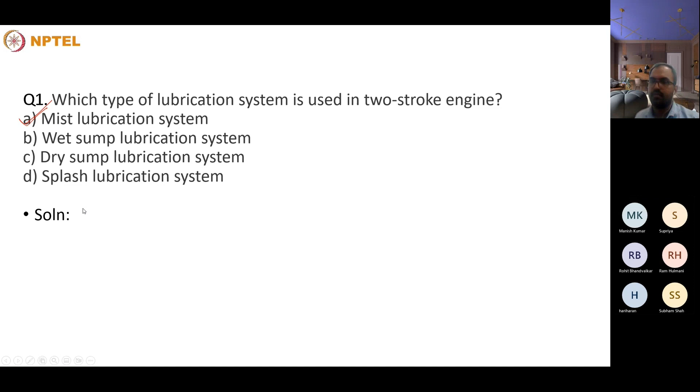Don't know the reason sir, but... Yes, so the splash lubrication system and pressure-based lubrication systems are the common forms used, but pressure-based systems are even more common than the splash-based system.

Here the lubricant oil will be passed through a sump, just like the splash system. There will be a sump from where the oil is pumped through different channels, with various distribution channels used for cooling and lubricating bearings, crankshaft, and piston cylinder arrangements. Compared to the splash system, where there is possibility of random splashing, the pressure-based system ensures only targeted areas are lubricated, not randomly every point.

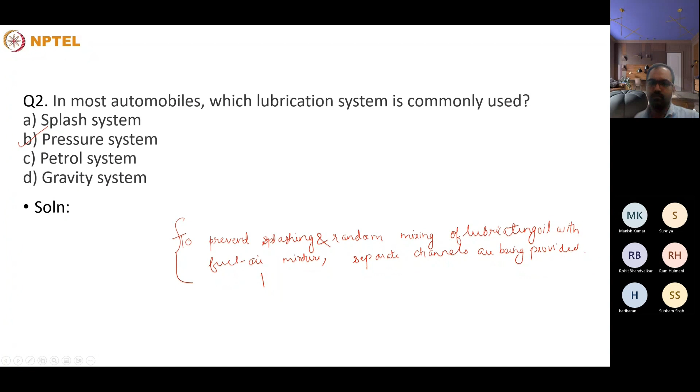The answer is a relief valve. The pressure inside the lubrication system is controlled by a relief valve. In the dry sump lubrication system, if the filter is clogged, the pressure relief valve opens, permitting oil to bypass the filter and reach the supply tank. So if the oil filter gets clogged by dust or impurities, pressure builds up which can be detrimental to the high pressure pump used in the lubricating oil line. To prevent that, we operate a relief valve which bypasses the oil and it goes back to its supply tank.

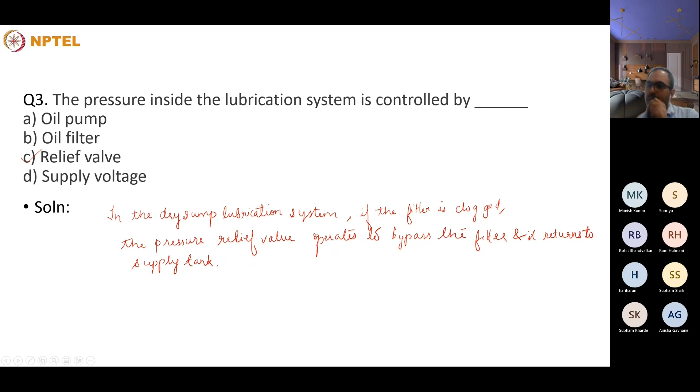Blow-by is a phenomenon in which the combustion gas produced in the cylinder escapes through the piston ring to the crankcase. So when the piston moves from top dead center to bottom dead center in the power stroke, the amount of combustion gas present in the cylinder will be less compared to the normal case, thereby we get comparatively lesser power if this blow by happens.

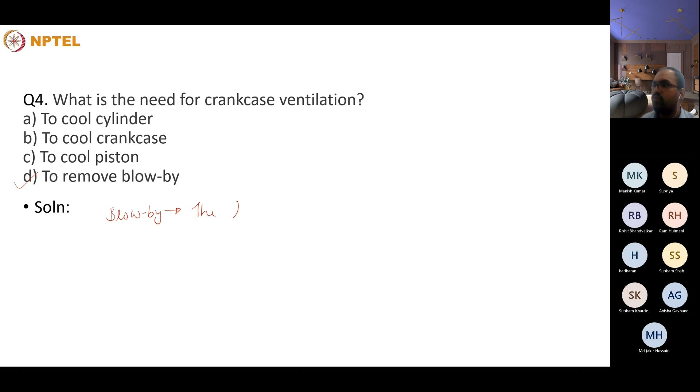The explanation is: blow by means the leakage of products of combustion of fuel-air mixture through the piston rings to the crankcase. This is an issue, and to prevent that, we have to provide ventilation.

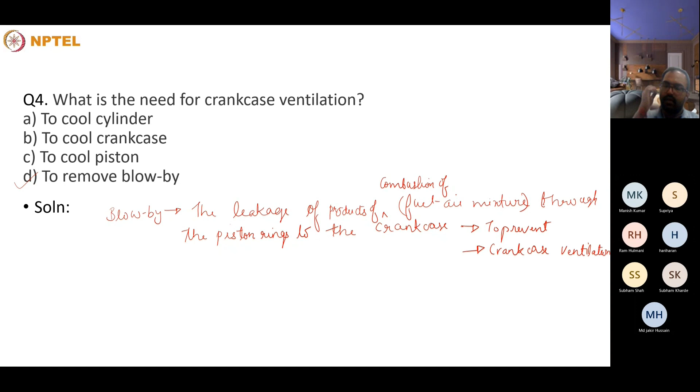We have to provide crankcase ventilation, an opening for the gas to go out to prevent damage, since these combustion products are at high temperature and high pressure, and that can damage the crankshaft and several other associated parts of the IC engine.

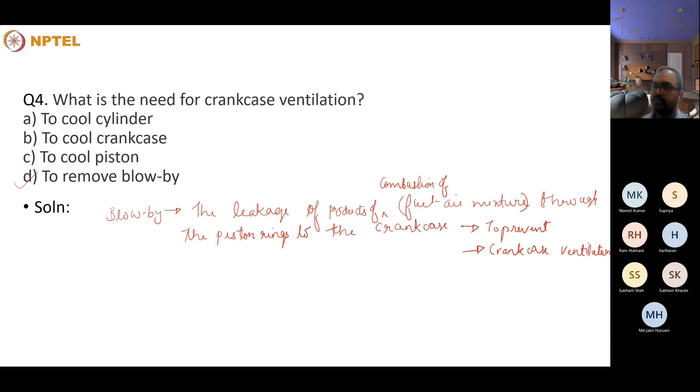The main reason why the lubricant is used is to smoothen out the sharp edges of the casted cylinder. The cylinder's surface will not be smooth; it might have some protrusions, and that can create frictional effects. This friction can act as an opposing force during the power stroke, and the maximum amount of power we can attain in the power stroke will be reduced because of this. To prevent that, we should provide some lubrication, given by the oil, lubricant, different kinds of lubricant oils.

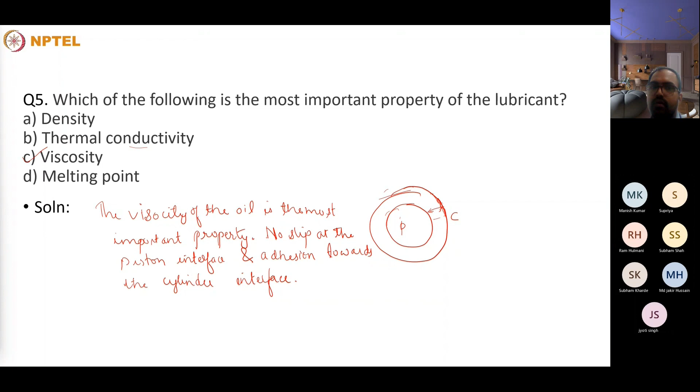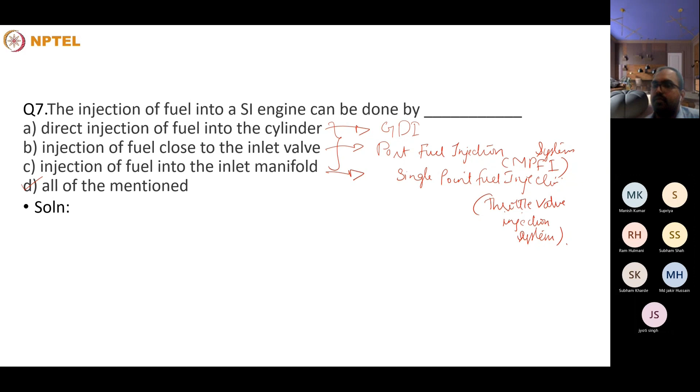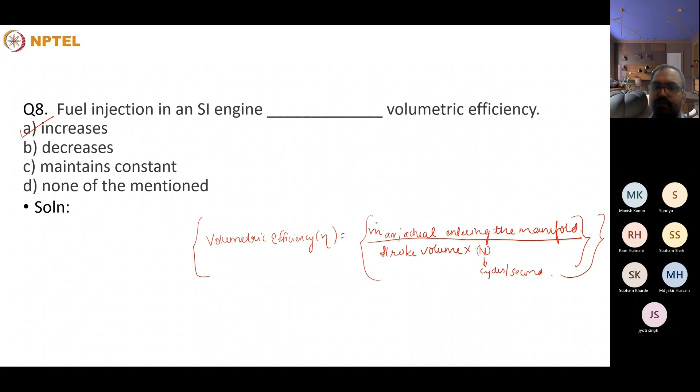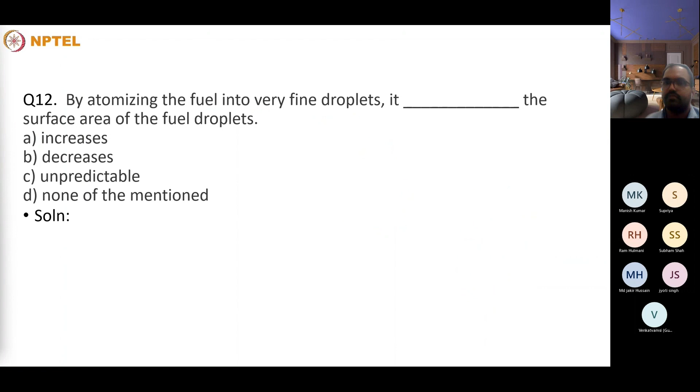Right, okay, so the answer is all of them mentioned. It can be used for finely atomizing the fuel. A compression spring will be doing the up and down of the spindle. Nozzle, which will be directing the fuel into the air, and then there will be an injector body which will be having the high pressure fuel in it. So all these will be combining together to form an assembly of the injector, all performing particular duties.

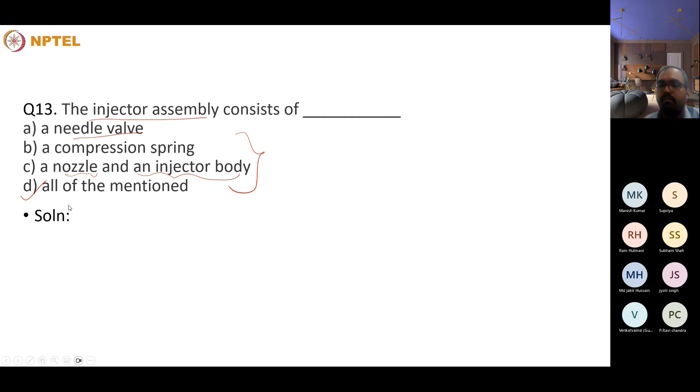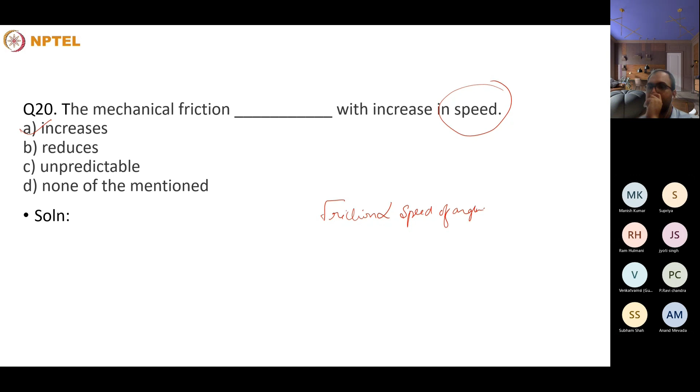Sir, excuse me. Is that frictional power, sir? No, that is also there - that will also take into account the friction of the cylinder. But in that case, what we mentioned was that we compared between different loads, right? Full loads and half loads.

Here it is with respect to the speed. So what we considered there was that with respect to the load, the frictional power remains the same. So the brake power varies and correspondingly the indicated power will also vary. Frictional power remains constant with respect to load - in one of the previous classes we have studied that, right? But with respect to speed of the engine, friction will be increasing. So the more the RPM at which the crankshaft rotates, the piston correspondingly will be moving that much faster, and correspondingly the friction associated will also increase. Understood? Yes, sir.

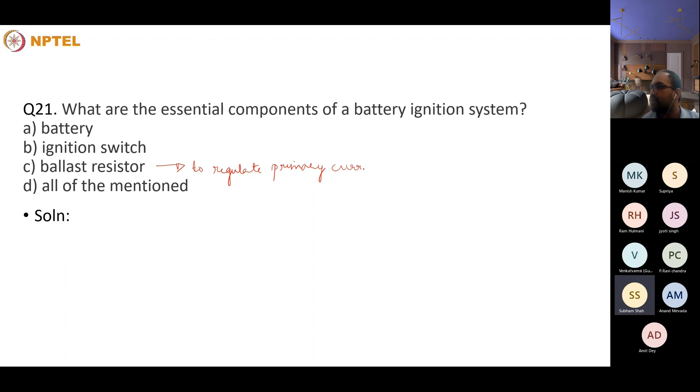So can anyone say what is the use of a ballast resistor? Why is a ballast resistor used? Why is a resistor used in a... to regulate the primary current in order to increase the life of breaker contact points. Right, so ballast resistor is used to regulate primary current - primary current means current in the primary circuit - to increase the life of breaker contact points.

Why is an ignition switch used? Can anyone say? Sir, it's simply the job of a switch - to connect or disconnect the ignition system, sir. Right, right, it's used just for connecting or disconnecting. Yes sir, it's simple.

Some other features are that there will be some capacitors, breaker points, a primary coil and a secondary coil. The EMF produced in the primary coil, the variation of current, will be generating a corresponding EMF in the secondary coil.

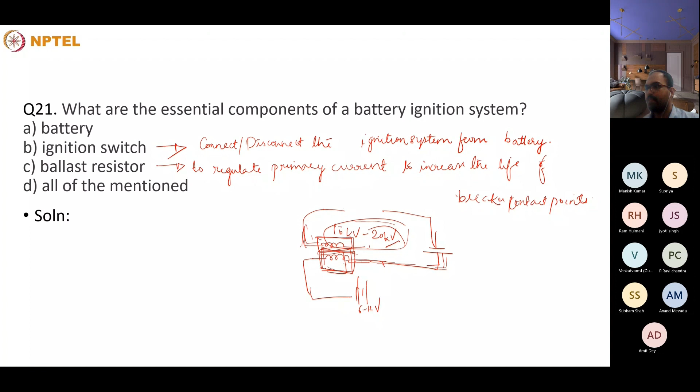This is a diesel fuel injection system, the CI injection case. So what will be the inputs used in an electronically controlled diesel fuel injection system? The options are engine speed, crankshaft position, accelerating pedal position.

How many of you know what will be the process of modern diesel fuel injection systems? What will be the components of a fuel injection system? Take the case of electronic fuel injection. So what will be the components?

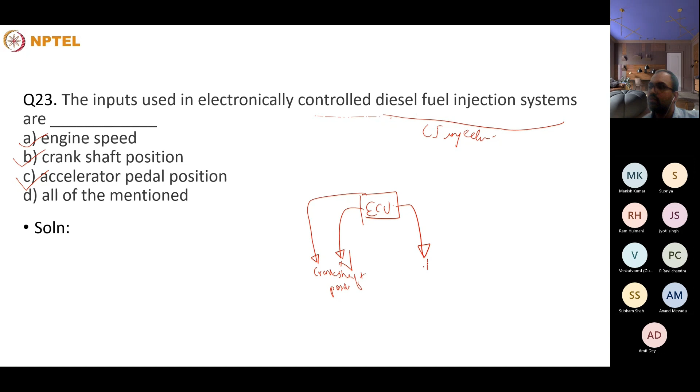There will be an ECU, electronic control unit, and that will be taking input from a lot of things. One is engine speed, another is crankshaft position, another is accelerating pedal position of the throttle. Also it will be taking the inlet air temperature, cooling water temperature, cooling jacket temperature, or lubricant oil temperature, and also the incoming ambient air temperature.

Using these inputs, the electronic control unit will be checking what the appropriate condition is right now, and based on that it will take a decision, and that feedback will be given to a fuel pump system, which will regulate the flow of fuel to be injected into the incoming air, maybe in the inlet manifold or near the port.

Based on these inputs, the fuel volume flow rate will be controlled depending on which case we operate the engine. If idling, we need a rich mixture. If cruising, we need a lean mixture. If accelerating, when we need more power, we again need a rich mixture. So based on this, we control the volume flow rate. The inputs can be engine speed, crankshaft position, accelerating pedal position (throttle position), intake air temperature, lubricant oil temperature, water jacket temperature, and ambient air temperature.

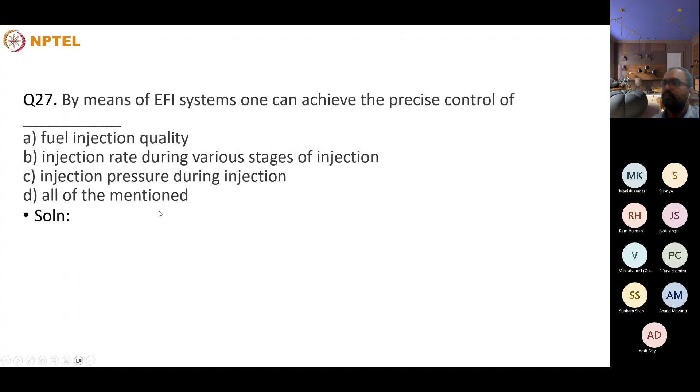This is a question regarding the quantity of fuel to be injected per cylinder per cycle. Can anyone please solve it and find out the answer? It's the case of a 6-cylinder, 4-stroke diesel engine developing 125 kilowatts at 3000 RPM. Its brake specific fuel consumption is 200 gram per kilowatt hour. Specific fuel consumption is in terms of mass divided by the power produced in the cycle.

Calculate the quantity of fuel to be injected per cycle per cylinder. Specific gravity of the fuel is taken as 0.85, so the relative density is 0.85. Can you please figure out what will be the quantity of fuel to be injected per cycle per cylinder?

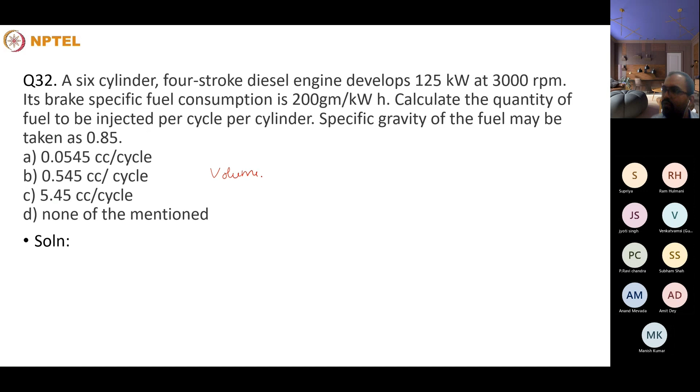Let me write this on the next page, otherwise it can be confusing. So the volume of fuel in terms of cc per cycle equal to mass of fuel per cycle divided by density of the fuel. So mass of fuel is 0.0463 grams divided by density in relative terms 0.85. We'll get somewhere around 0.0545 cc per cycle. So the answer is the first option.

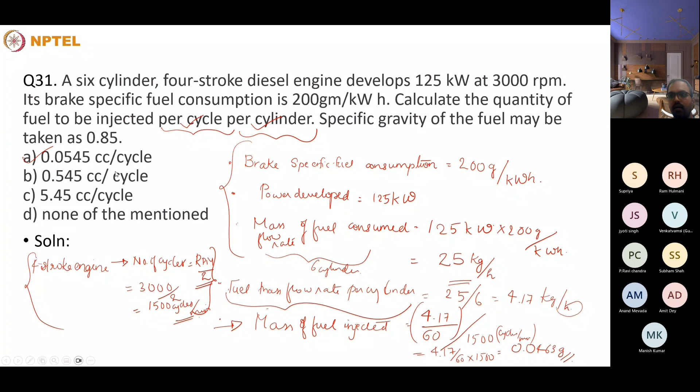So in that particular problem, we had the brake specific fuel consumption given. We calculate the mass flow rate of fuel based on the power developed, and that value is for all 6 cylinders combined together. We find the mass flow rate per cylinder, then calculate the mass of fuel injected from the mass flow rate of fuel by taking into consideration the number of cycles per minute of the four-stroke engine. After calculating the mass flow rate of fuel per cycle and per cylinder, we calculate the volume flow rate using the density, which is given as 0.85. Since the question's unit is given in terms of cubic centimeter, we used the relative density rather than the pure density.

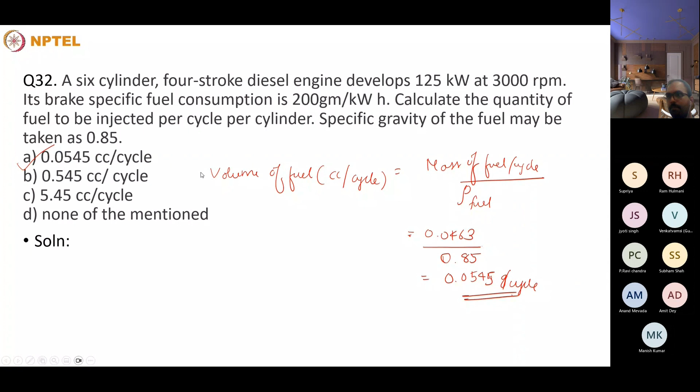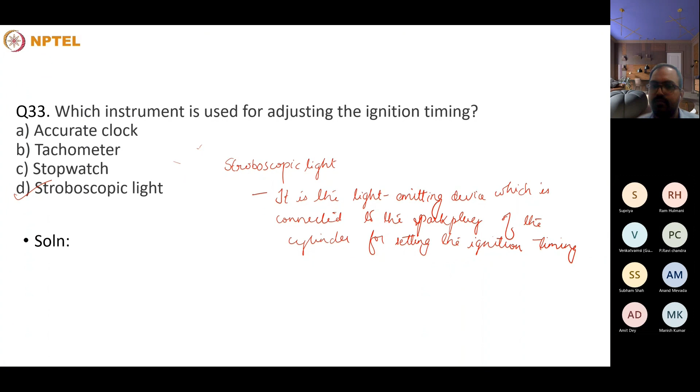This is the final problem for today's session. The answer, sir? Yeah, the answer to this problem is stroboscopic light.

This is the last portion which was discussed regarding thermochemistry.

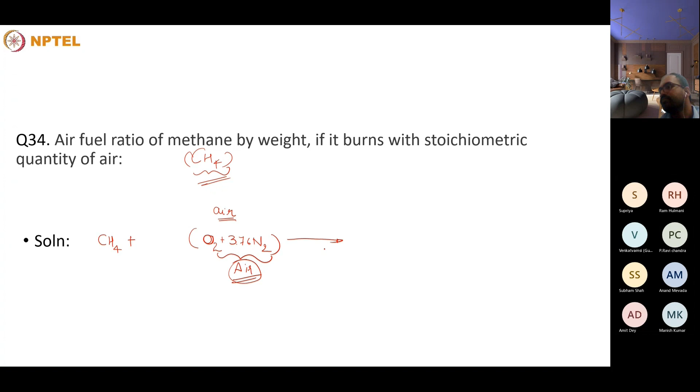So this is air. Air will be having 3.76 for 1 molecule of oxygen, there will be a corresponding 3.76 times nitrogen, and in normal combustion, complete combustion will give carbon dioxide, water, and this nitrogen doesn't take part in combustion, it's kind of inert.

So only oxygen takes part in combustion with methane. We should calculate the number of moles and try to balance this equation out. So methane plus O2 plus 3.76 nitrogen will be giving carbon dioxide, water, and nitrogen will be inert in this particular case. We assume there is no production of oxides of nitrogen, and we are not using any catalytic converters.

In this particular problem we will balance out the value of oxygen on both sides. For a hydrocarbon mixture of carbon and hydrogen, we can easily calculate the coefficient of the number of moles of oxygen required using the empirical formula: if CmHn corresponds to a general hydrocarbon, the number of molecules of oxygen required is given by m plus n divided by 4. In this case, m is equal to 1 and n is equal to 4, so the number of molecules is equal to 2.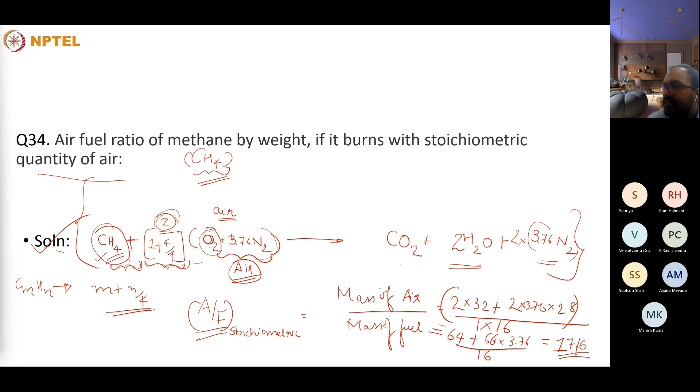So that finishes the session for this week. In this session, we have discussed briefly about the lubricating theory and lubricants used for IC engines, a few questions regarding them, and a few injection based questions. Also a few questions on ignition systems, where we discussed the components of ignition systems, and then the thermochemistry of fuels, ending with one question on balancing the quantity of air required for stoichiometric combustion of methane.

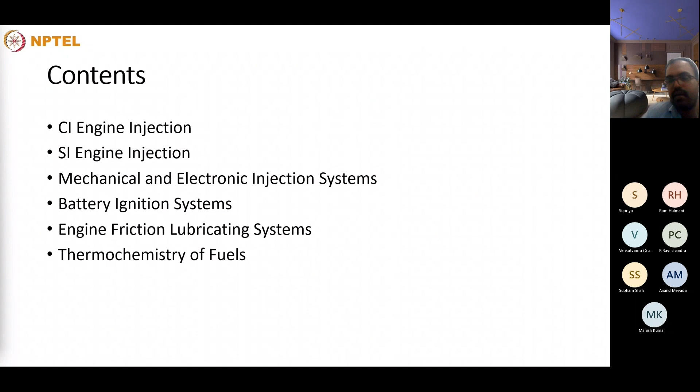That's the session. In the next week we will be discussing the knocking terms, more into SI and CI engine knocking, and a few questions about that we'll be discussing next Monday.

And for Shubham, I have looked into the question you asked last time regarding a diesel auto ignition case. So in the case of petrol, it all depends upon the bond energy. Diesel has got close to 10 carbon atoms.

Petrol has got 8 carbon atoms. So as the number of carbon atoms increases in a long chain, or if it's a straight long chain, the amount of bond energy required to break them is less. If it is more branched out, or the number of carbon atoms is less, as in the case of petrol, the bond energy required to break them is more. Because of that, diesel can be auto ignited at a lower temperature.